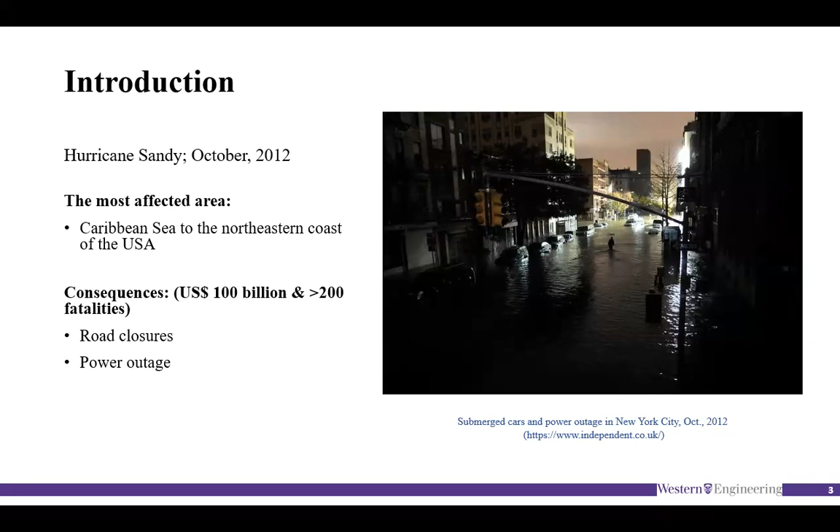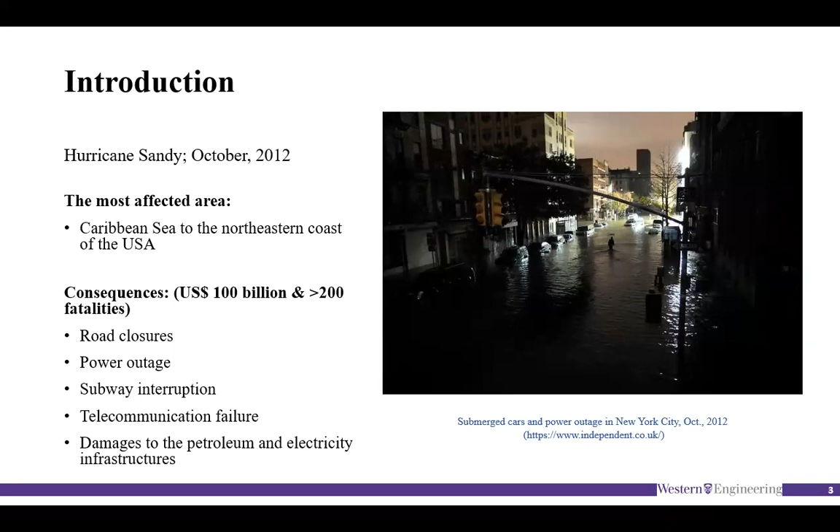So as an example, Hurricane Sandy occurred in October 2012, and the most affected area was the Caribbean Sea to the northeastern coast of the USA. The consequences of that event were more than 100 billion US dollars loss and more than 200 fatalities, besides road closures, power outages, subway interruptions, telecommunication failure and damages to petroleum and electricity infrastructures. My research mainly focuses on interconnected infrastructure systems.

Another example is tropical storm Matthew, which occurred in September 2016, again in the Caribbean Sea to the eastern seaboard of the US. The consequences were damages to telecommunications, roads, water supply, healthcare facilities, and power distribution that affected the other entities or assets in that area.

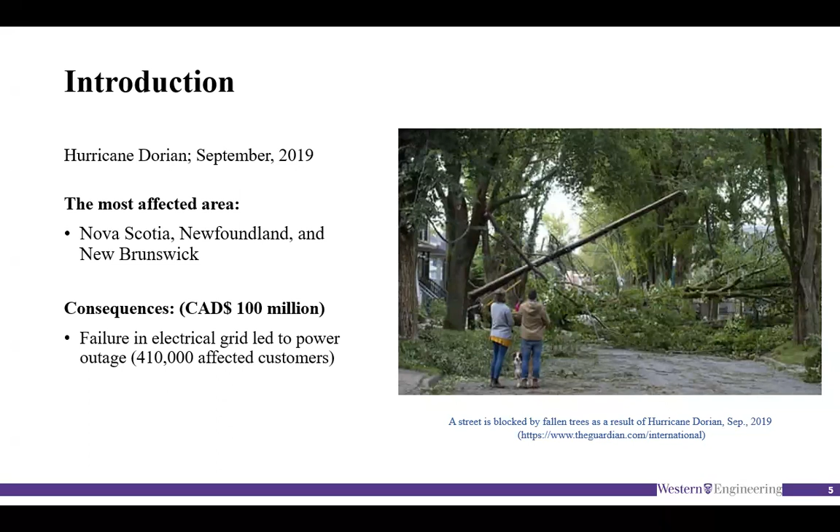Hurricane Dorian, September 2019: in Canada, Nova Scotia, Newfoundland, and New Brunswick were affected by that event. Failure in the electrical grid led to power outage for more than 400,000 people, and telecommunication failure, road closure. So critical infrastructure is crucial for all communities, and basically any disruption, small or not, can affect the performance of those infrastructures.

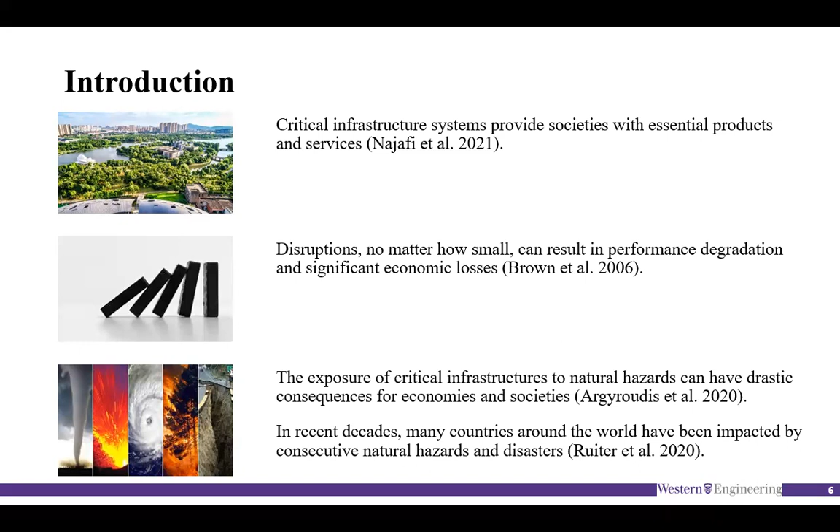I chose this picture to show how one failure in one of the entities can propagate through the interconnected system, like a domino effect or cascading effect. Based on the exposure of critical infrastructures to natural hazards around the world, many countries deal with the effect of these events on critical infrastructures.

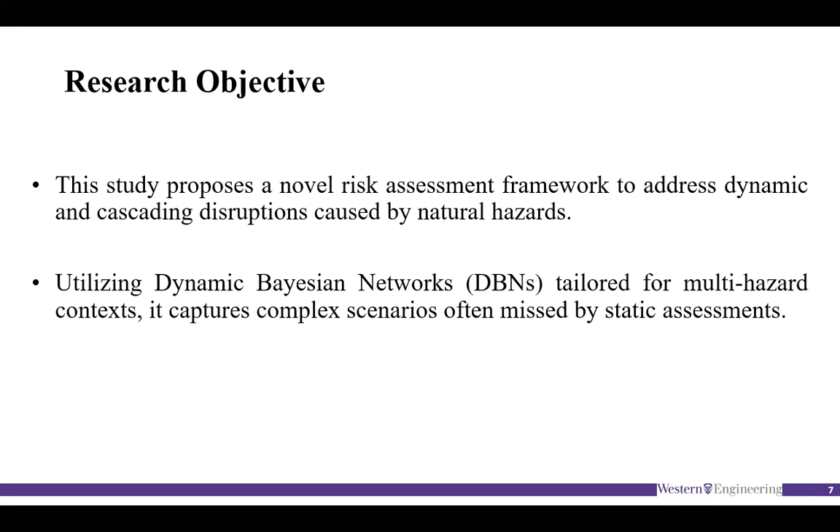So the objective of this work is to develop a novel risk assessment framework to address the dynamic effect of natural hazards or any hazard on interconnected systems. So we utilize the dynamic Bayesian network to do the multi-hazard risk assessment on the infrastructures.

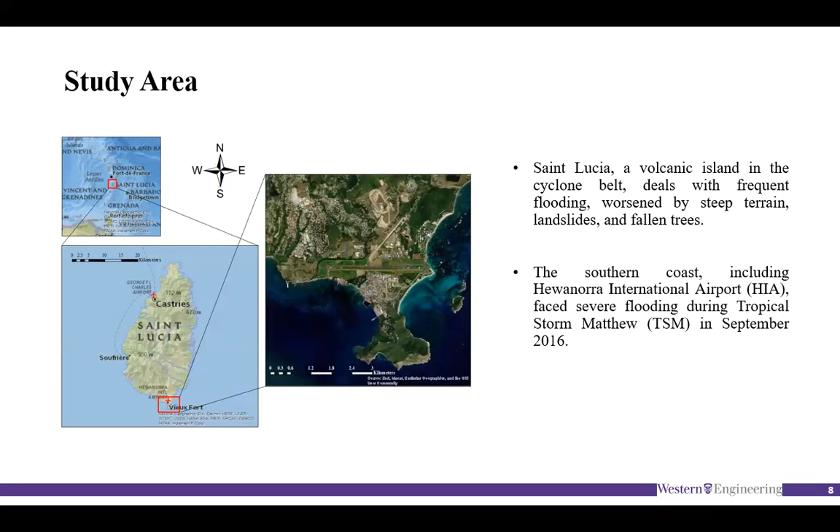The study area that we chose is Saint Lucia, a volcanic island in the Caribbean Sea. And we only focus on the southern part of Saint Lucia. There is a very important international airport there. And the data that we have related to the interconnected complex system includes 109 entities, including assets and components located in that area.

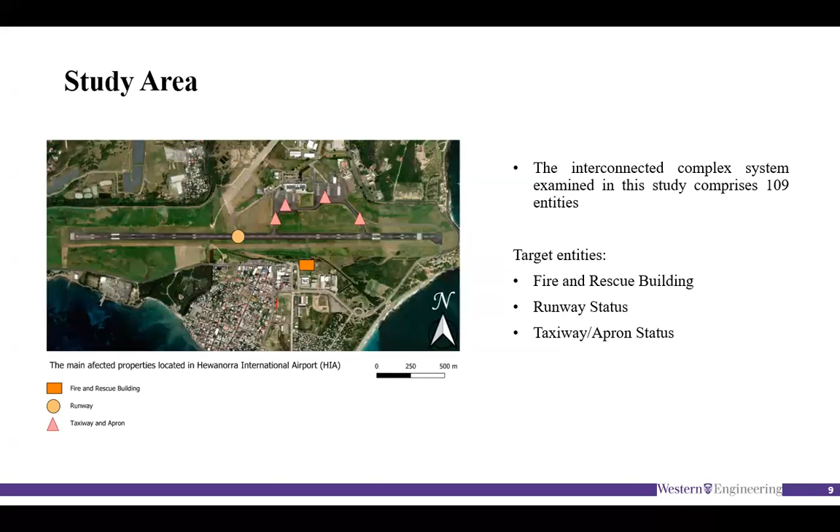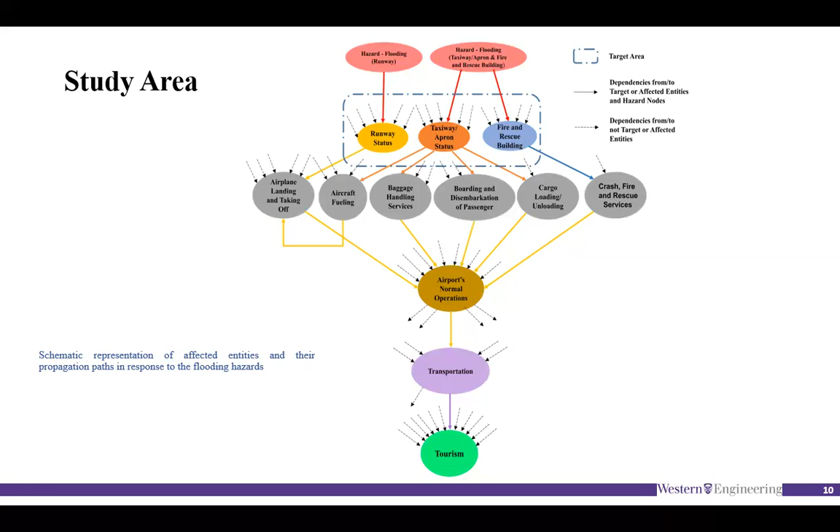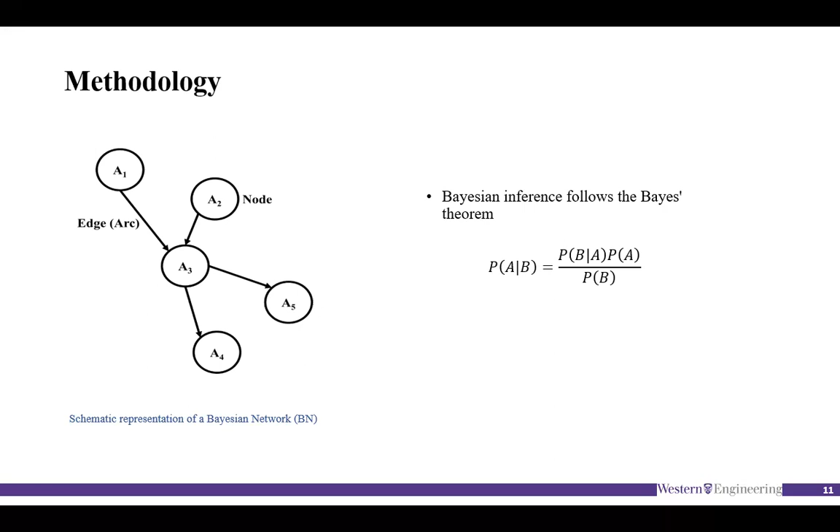It shows the Bayesian network model of the connected network, where each node represents one of the assets or components located in that area, and each edge shows the interconnection or dependency between the nodes.

The aim of this research was going beyond the static assessment of the risk. So we decided to use this to follow the event, like having disruption during the event or after the event, and having restoration after the event.

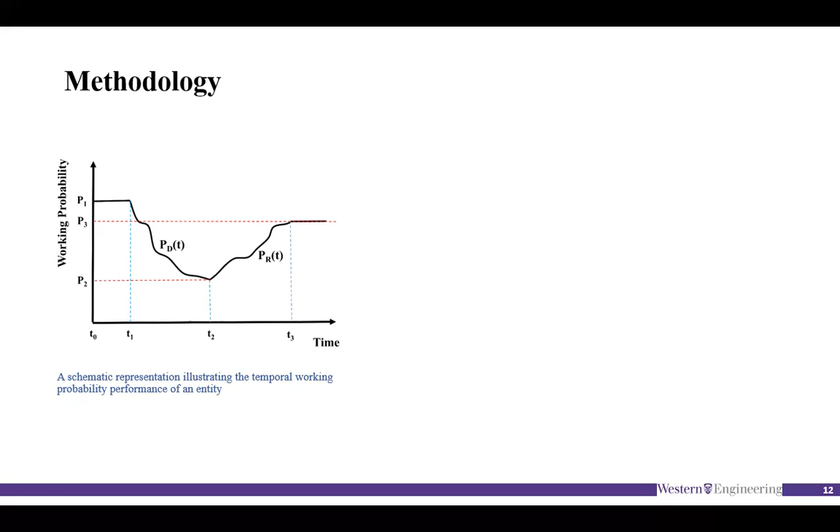So we moved forward to dynamic Bayesian network, which is the extension of Bayesian network, in which each slice is a Bayesian network connected to the previous state of itself. Each node can connect to its parent in the same time slice, can be connected to the previous state of itself, and can be connected to the previous state of its parent node.

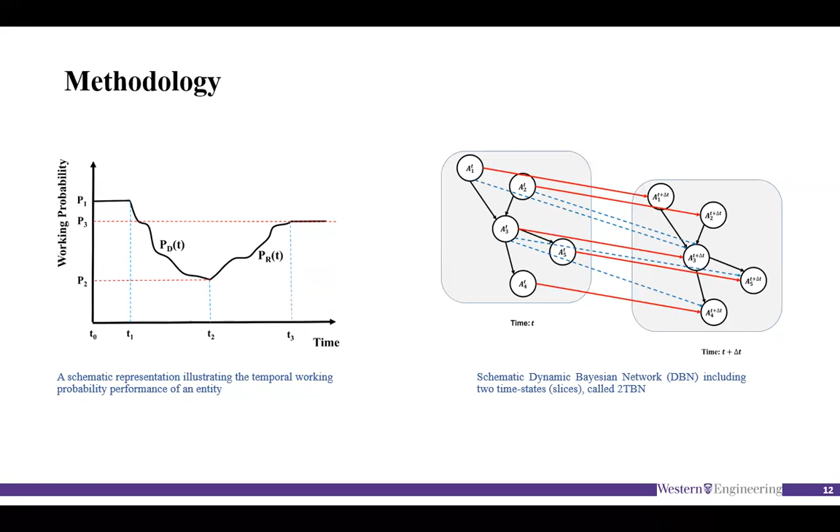So we simulated the disruption. This figure shows two slices of the disruptions. We have these three target nodes, and the two flooding nodes affect these three nodes. I didn't show the other 106 nodes in this figure. T0 and T1 show two slices of the disruption behavior of the system, and these two slices show the restoration time. We don't have any flooding node in this figure, and we have 13 different slices for restoration.

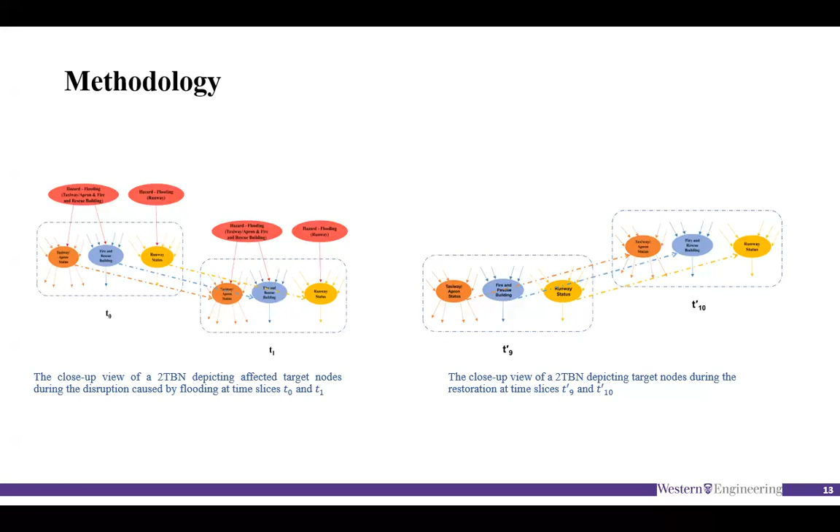We have 9 time slices for disruption and 13 time slices for the restoration based on the data that we have. Based on the time of the flooding, I didn't show these data here, but we have some data related to the duration of the flooding and duration of the restoration based on the data that we could find from the news reports.

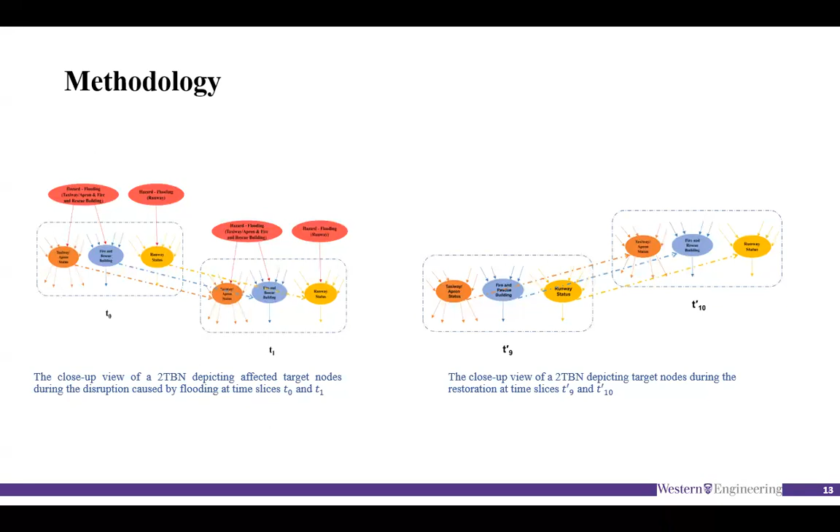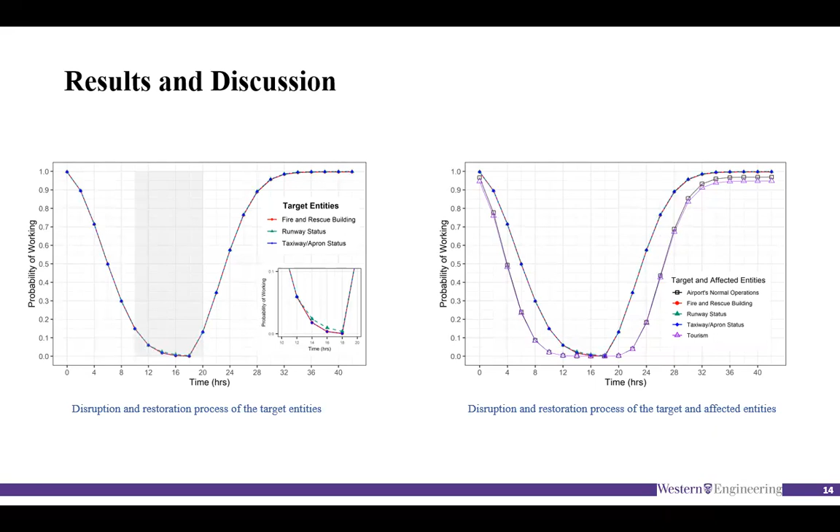So this figure shows the disruption and restoration of the target entities, the 3 entities affected by the flooding. And we only try to focus on the airport normal operation and tourism. So this figure shows the disruption and restoration of the airport and the tourism based on the disruption and restoration of those 3 target nodes.

So we decided to use 7 different scenarios. The first one shows a scenario in which all 3 target nodes fail. 3 scenarios show just 2 of 3 target nodes failing. And the last 3 scenarios show just one of these three target nodes failing. Basically, we wanted to show how any mitigation method that can prevent failure of any of these target nodes can affect the disruption and restoration of operation of the airport or of the tourism.

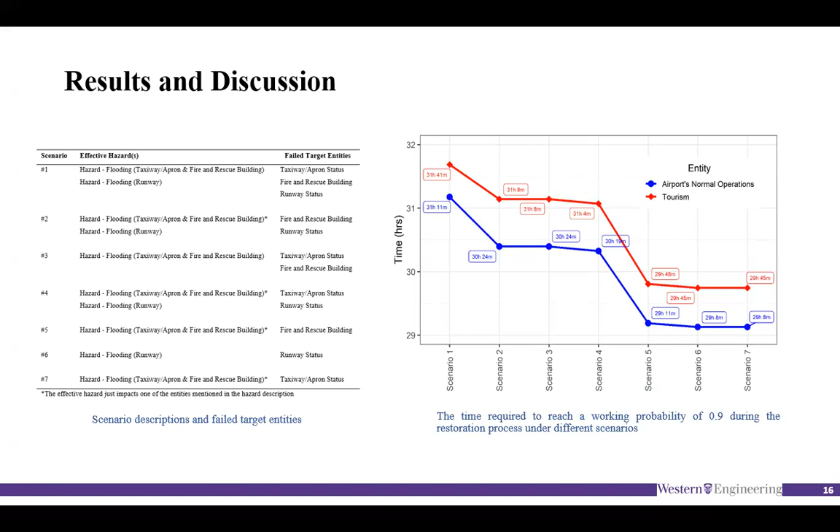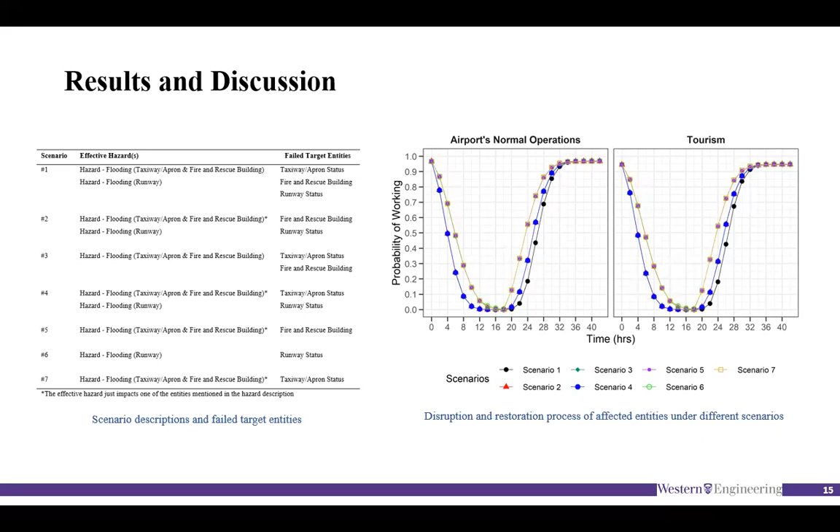Based on that, this figure shows the disruption and restoration of operation of the airport and tourism based on these 7 different scenarios that we tried to simulate. And this figure shows how long it takes for each of the airport normal operation and tourism nodes to get again the working probability of 90% after the restoration.

One of the other objectives that we tried to address in this study was how to simulate multi-hazards, having more than one hazard in the event. Unfortunately, we didn't have enough data for the other hazard, but we could find some news and reports that showed there were some landslides that caused road closures in that area corresponding to that event. So we tried to simulate multi-hazard, adding landslide that causes disruption in the transportation system.

So we simulated that we have disruption for intercity road transportation, one of the entities included in the 109 nodes that were introduced. We assumed that we have disruption in intercity road transportation because we had some reports that mentioned some of the roads were closed because of the landslides. And we assumed that after the event, we have some portion of restoration for that case, based on data that we could find in the news.

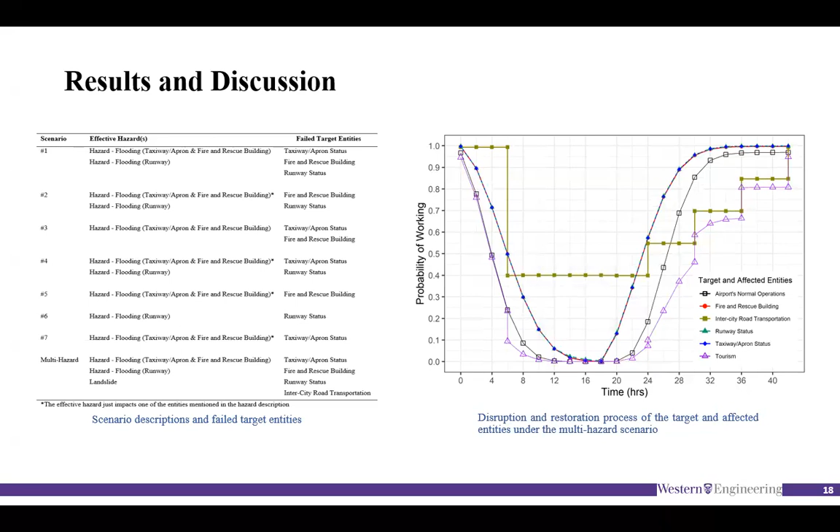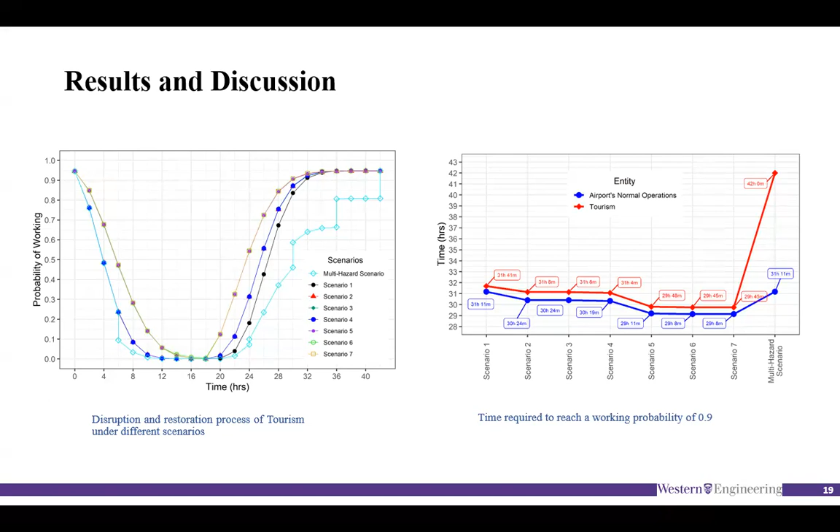This figure shows disruption and restoration of the target nodes. For the tourism, we can see that in the last scenario that we chose, the tourism is affected by the disruption of the intercity road transportation. And this figure shows the time that it takes to reach 90% of the restoration for tourism and airport for this multi-hazard section.

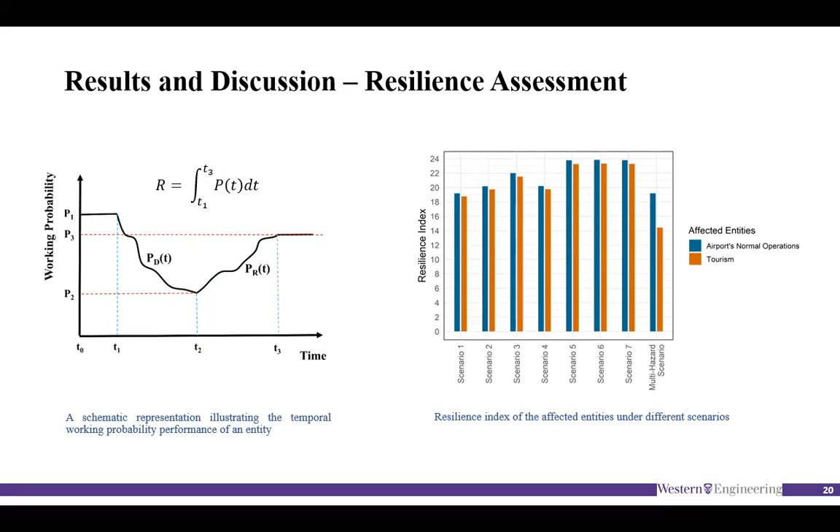So based on this approach, we try to find the resilience index corresponding to those two nodes based on different scenarios. And as a conclusion, we find that dynamic Bayesian network is a good approach to come up with multi-hazard resilience assessment for the complex system.

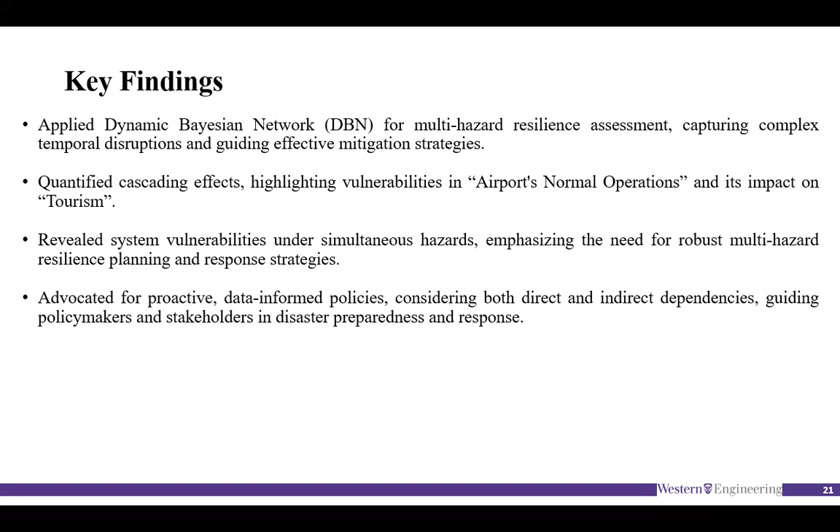And we could find that normal operation of the airport and the tourism are two vulnerable entities located in this area. And actually, we need to have a robust framework to assess the risk, and we could consider direct and indirect dependencies in any interconnected systems to assess the risk.

And at the end, for future studies, we can consider a wide range of hazards or different resilience metrics, and having more accurate data can actually move the developed framework to have a comprehensive risk and resilience assessment.

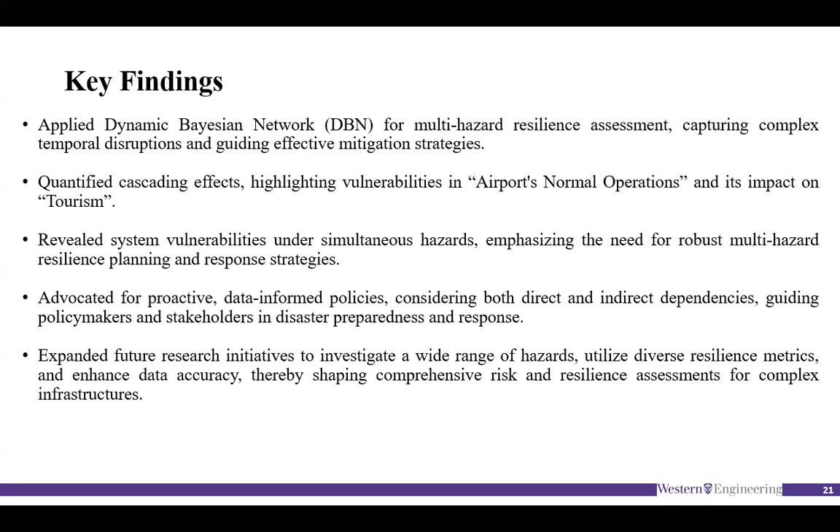You mentioned data a couple of times. Was it the lack of data because of the location of the study? Actually, at first, we tried to find data related to the interconnected infrastructure system in Canada, but I couldn't find anything because the problem is getting the data on interconnected infrastructure from different stakeholders.

But the study area that we chose was the study area where Dr. Najafi did another approach of risk assessment with one of his students before. However, they used another commercial system to come up with the risk assessment. We added some assumptions and some calculations to come up with probabilities assigned to each entity. And based on that, we could actually use this data to check whether the framework works or not.

Thank you very much. Thank you. Yeah. If you're okay. You're okay. Okay. Cool. So third speaker of the day is Elshaimaa Ahmed. So the laser is this one. Yeah.

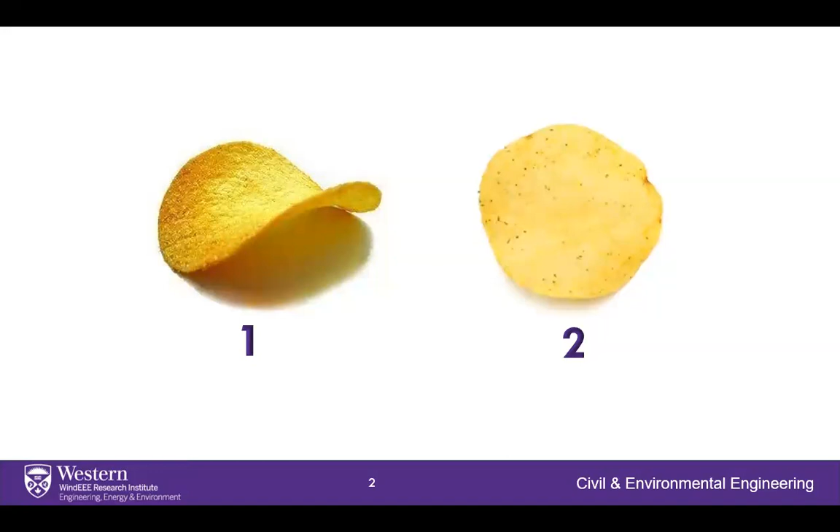In my presentation, I'll talk about the introduction of this research, the objective, methodology, results and discussion, and finally the conclusion. Cable domes. Cable domes are one of the most widely used types of cable structure because of their lightweight, aesthetic view, and adaptable forms. They can be used for covering large areas such as arenas and stadiums, and consist of cables and struts, self-balanced by a proper state of self-stress with a marginal beam.

The first established form of cable dome with positive Gaussian curvature was the Geiger dome in Seoul, while the largest one was the Georgia Dome in Atlanta. The biggest challenge in designing cable domes is the potential instability under excessive loading due to slacking cables or buckling in struts. And this motivated designers to develop new forms with better stability and rigidity.

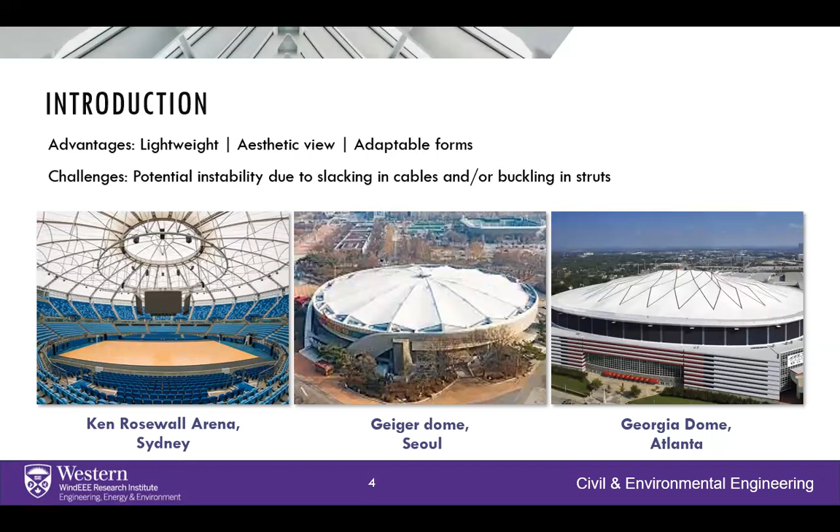As you can see here in the first picture, this is the traditional one with positive curvature. Two new forms with zero and negative Gaussian curvature were developed recently. The first one was developed by moving a positive curve over a straight line, while the second one was developed by moving a positive curve over a negative curve.

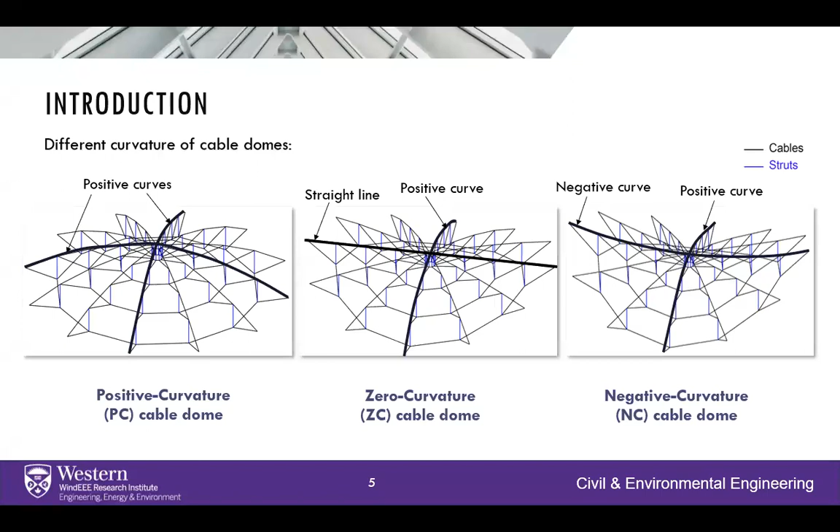Those new forms are intended to have better stability and rigidity than the positive Gaussian curvature, because of the double curvature of the roof. Actually, the positive one has the bearing function, while the negative one has a stabilizing function. But this should be thoroughly investigated before using it in practical application.

In this regard, this research, actually part of my research, aims at investigating and comparing the rigidity and stability of those two new forms to that of the traditional positive Gaussian curvature, and also studying the effect of rise and sag values on the rigidity and stability.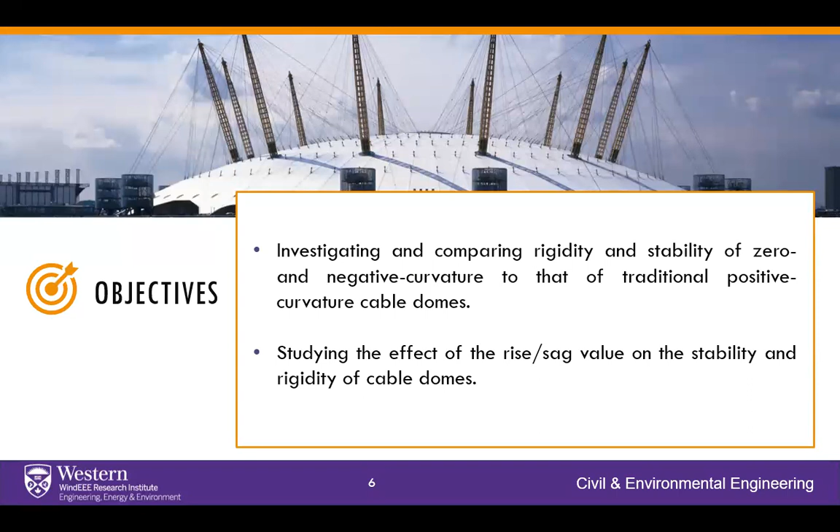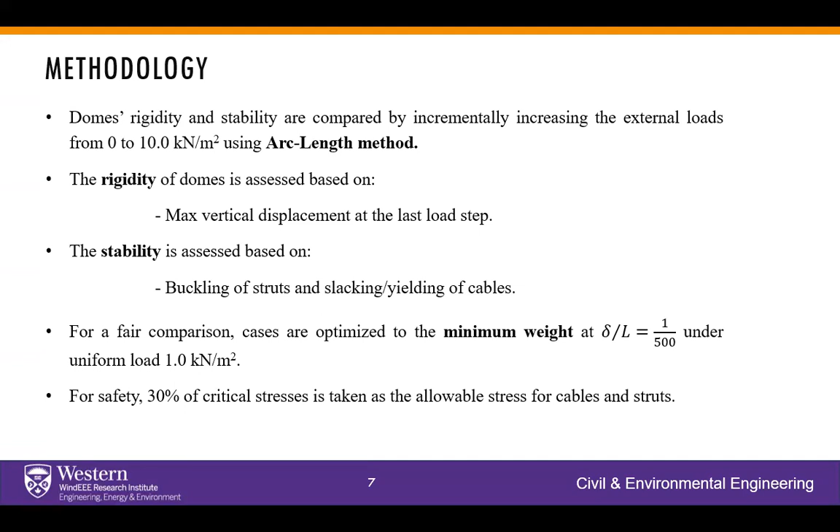To do this, we employ the arc length method by incrementally increasing the external load from 0 to 10 kilonewtons. The rigidity is assessed based on the maximum deformation, while stability is assessed based on the buckling in struts and the slacking in cables. And all case studies will be designed and optimized to the minimum weight at L/500 displacement for a fair comparison.

The known and unknown parameters for the case studies are as follows. As you can see here in this picture, all domes have the same plan dimension, X and Y coordinates, and also the same length of struts. As you can see here, all of the cases have the same length of struts.

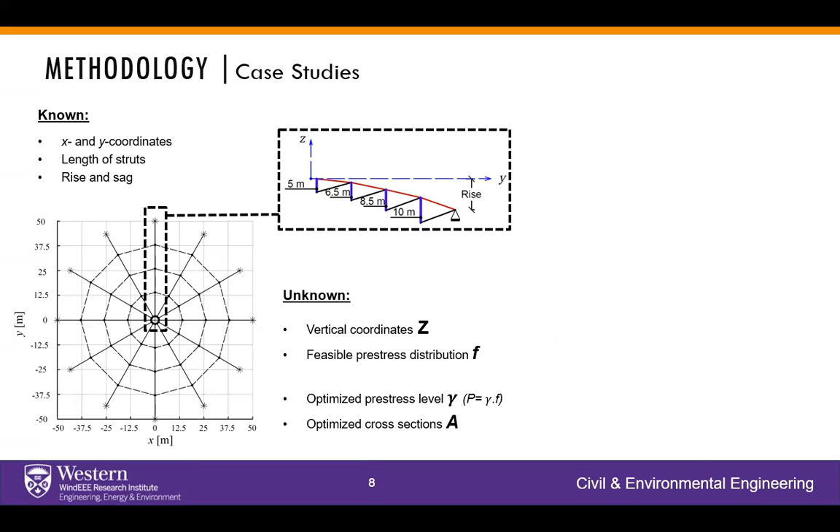Along the Y direction, all of them have the same rise, 10 meters, and along the X direction, the positive one has rise 10 meters, while 0 is a straight line, and the negative one has sag for the negative curve, 4 and 8 meters, to investigate the effect of changing the sag on the rigidity and stability. So a total of 4 domes are considered in this study.

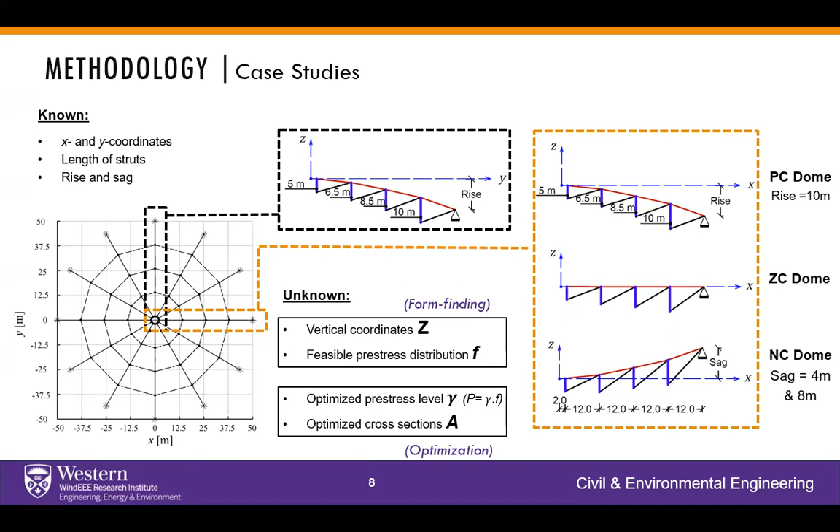The unknown parameters are as follows. The first category is the vertical coordinates of all nodes and the pre-stress distribution in cables and struts, usually defined through a process called form finding. Second, the cross-sectional area and the magnifier of this pre-stress by a factor gamma, and those are optimized to the minimum weight through an optimization algorithm.

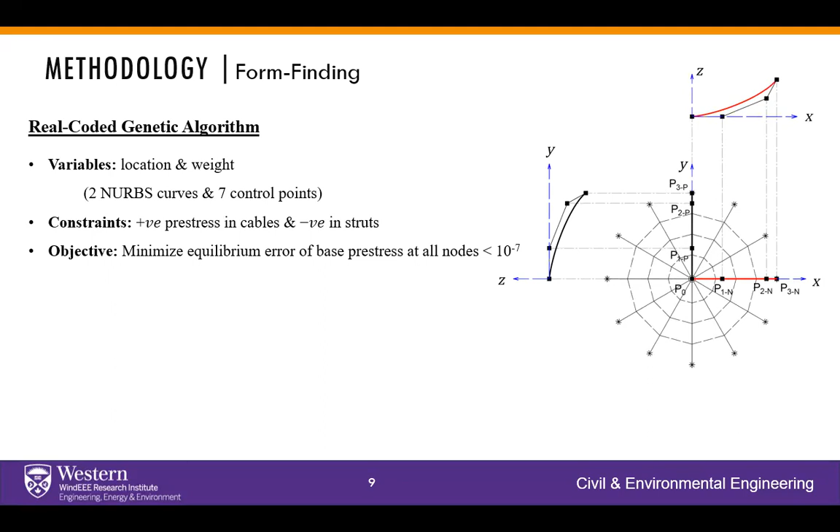For the first step, which is the form finding, we develop a real-coded genetic algorithm that represents the surface with 2 NURBS curves. The first along the x-axis with 4 control points and a negative curvature, and the second along the y-axis with 4 control points and positive curvature. The control points are the variables of the algorithm, and each candidate generated by the genetic algorithm develops a NURBS surface, and then the dome is projected on that NURBS surface.

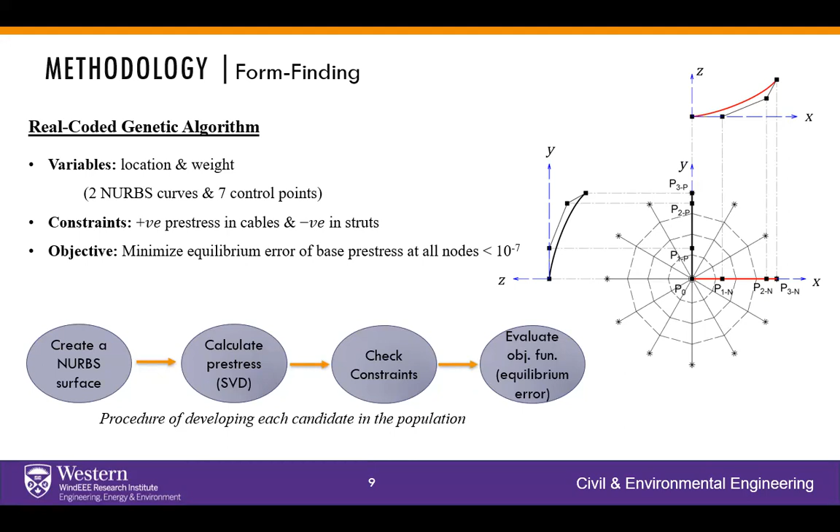And using the SVD technique, we can calculate the pre-stress. Then it checks the constraints, which is tension in cables and compression in struts. After this, we calculate the equilibrium error of this pre-stress at all nodes. The summation in x, y, z should equal 0. And the aim of this algorithm is to find a NURBS curve with minimal equilibrium error at all nodes, less than 10 to the -7. So this is the first step.

The second step after getting the feasible form is to optimize the cross-section and the level of that pre-stress. It's usually one number denoted by gamma, and the procedure is to assume an initial value for the pre-stress, for example, 40 meganewtons. And through the sub-iteration, we design the dome to the minimum weight and get the weight and displacement corresponding to the 40 meganewtons.

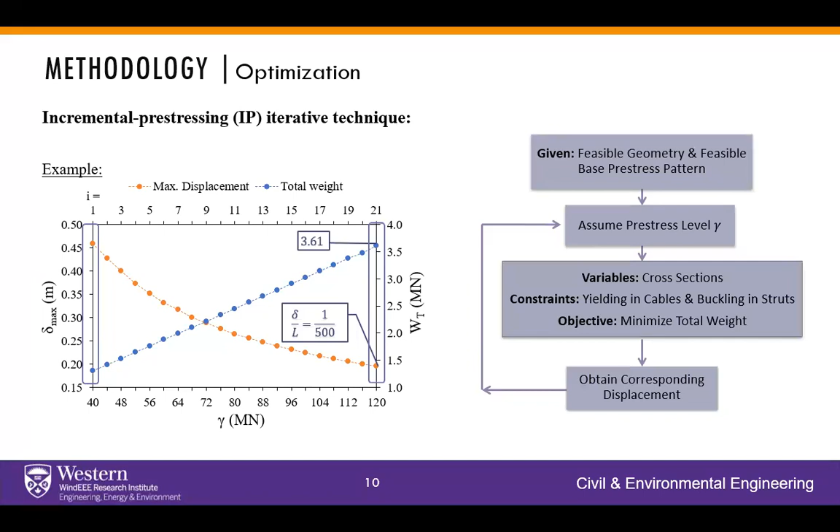And by increasing the level of pre-stress incrementally, the total displacement decreases till it reaches L over 500 and the iteration stops. This is our target displacement for all domes. After optimizing the dome, we applied the arc length method by incrementally increasing the external load from 0 to 10 kilonewtons and monitored the stresses in cables, the black lines, and in struts, the blue lines.

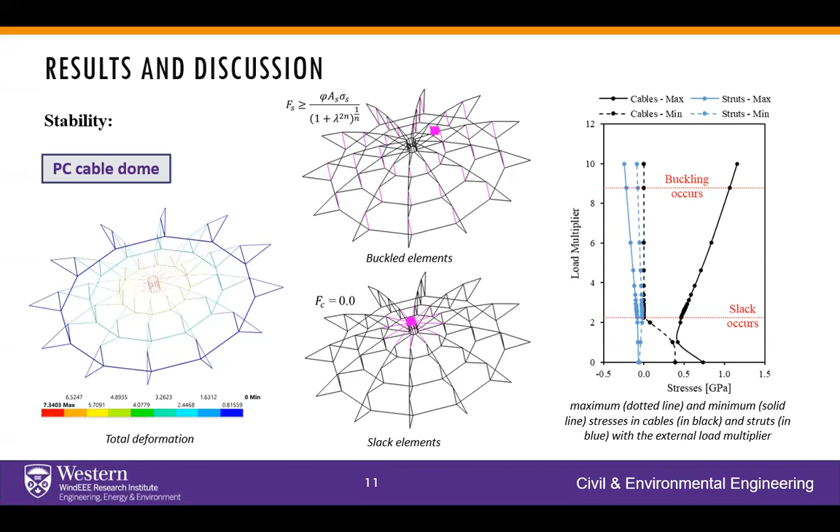And as you can see here, for the positive cable dome, the traditional one, slack occurred at load multiplier 2 in all cables around this ring B. And at load multiplier 8.5, buckling occurred in all struts. And this indicates failure of this traditional dome under excessive loading. While for the 0 curvature dome, no slack happened in the cables. However, buckling occurred at load multiplier 6 due to the rotation of those upper nodes, causing rigid body buckling of the struts.

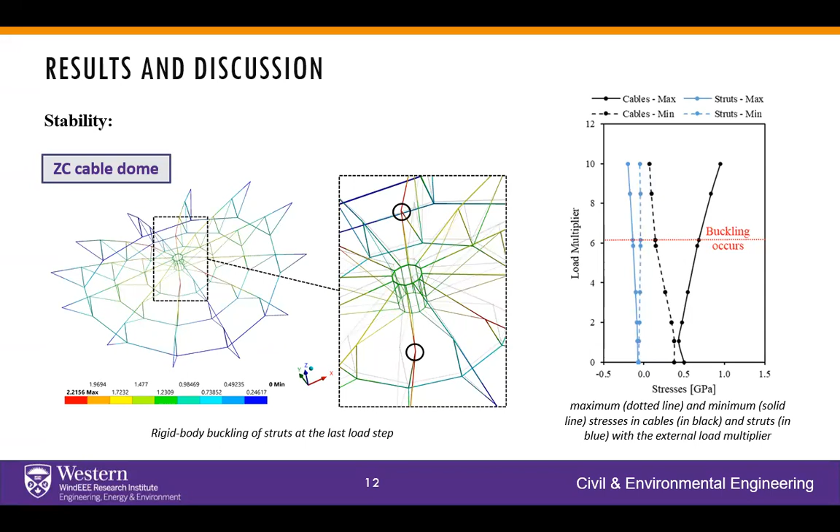Okay. For the negative one with 4 meters, we didn't see any slack in cables, and buckling occurred at load multiplier 9.5, which is very good, and only happened at the outermost struts along this stabilizing cable. So the negative curvature shows more stability than the positive and 0. Increasing the sag to 8 meters decreased the stability a little bit, with buckling occurring at load multiplier 6 in 4 struts.

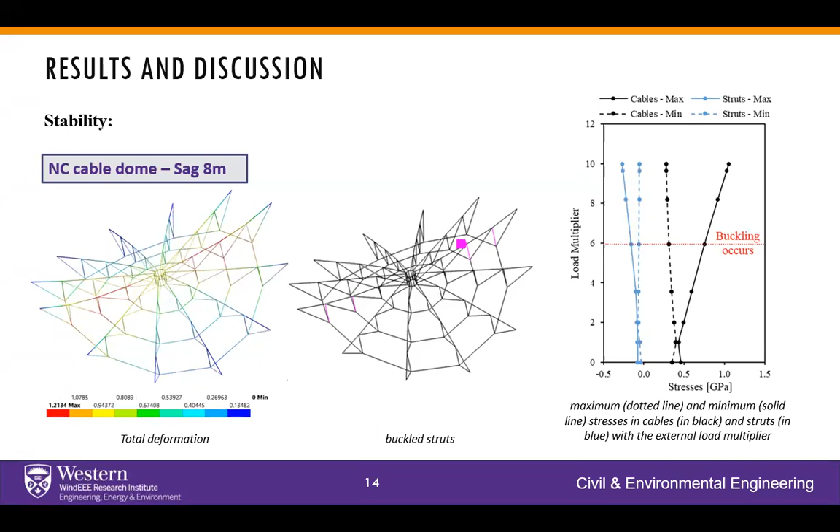For the rigidity, we monitored the maximum displacement with the load multiplier for the 4 cases. As you can see here, the yellow one, the positive curvature dome, the traditional one, the rigidity started to decrease drastically at load multiplier 2 due to the slacking cables and buckling in all struts. While the 0 curvature dome, the dark blue, experienced buckling at load multiplier 6 and started to decrease in rigidity.

While the negative curvature domes with sag 4 and 8 meters actually showed great rigidity with increasing loading, and thus we conclude that the negative curvature dome has more rigidity than the 0 and positive curvature cable domes.

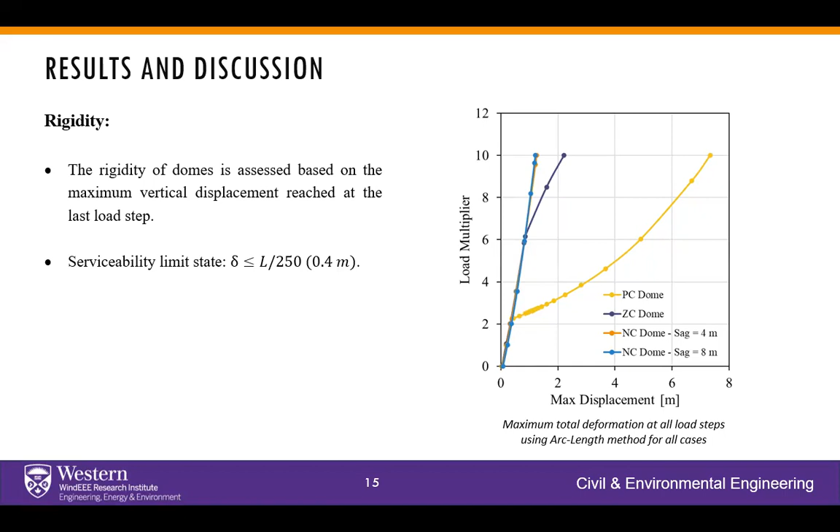To sum up, the negative Gaussian curvature cable dome has more rigidity and stability than the traditional positive curvature and also than the zero Gaussian curvature cable dome. And the stability decreases slightly with increasing sag, while the zero curvature dome loses its stability due to the rigid body buckling of struts.

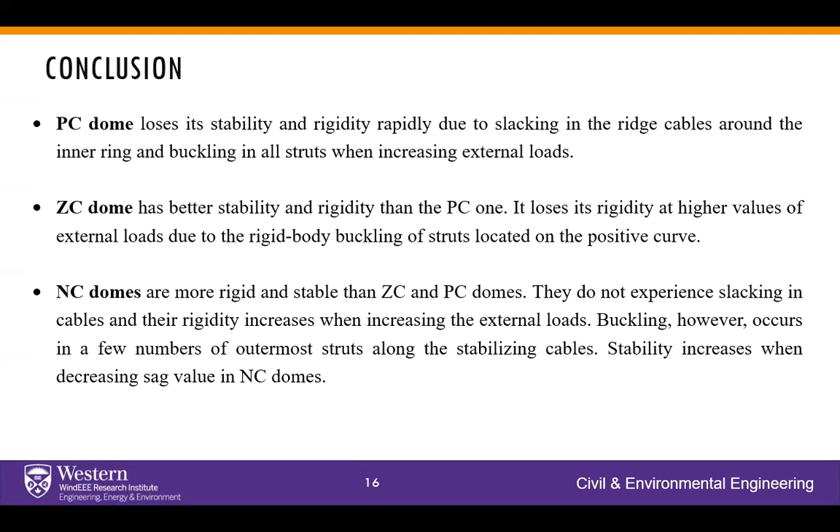The positive Gaussian curvature dome is the worst form because it loses its stability and rigidity under excessive loading due to slack in cables and buckling in all struts. And back to the question in the beginning, I think you figured out that you had the correct answer, that the double curved surface is more stiff and rigid than the flat one.